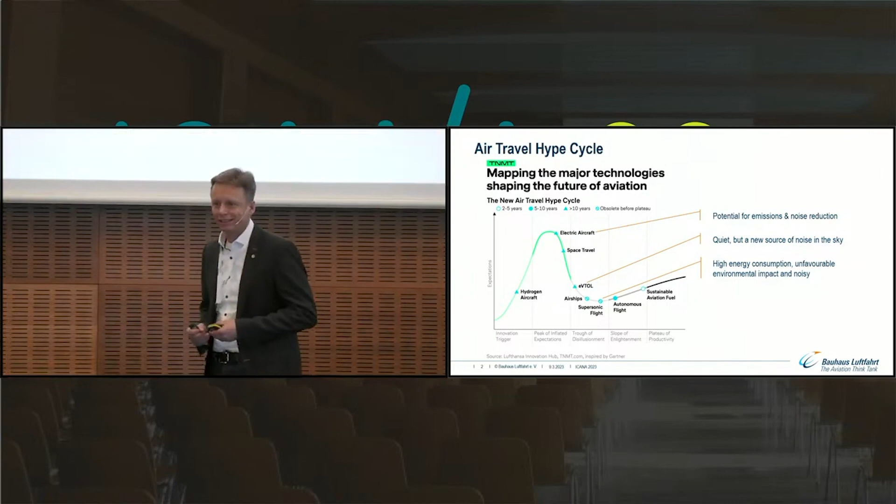And the first and foremost concept that I found was from the colleagues from the Lufthansa Innovation Hub. In the past few weeks, they looked into the Gartner hype cycle, the technologies and the different stages and where they are. There were many things that we are also dealing with, but they reflect also on what might happen with respect to noise.

Many things have been mentioned: sustainable aviation fuels, hydrogen - that's emission avoidance and reduction rather, it has little to do with noise directly. Autonomous flights only make the cockpit more quiet because there are fewer pilots, but not necessarily on the ground.

There is a bit of potential with electrical flying. We are far away from having that in aviation. Space travel, I leave that out.

Another subject found on the hype cycle is eVTOL, the air taxis. Definitely that's not a source of noise that we can compare with what we see at the airports, and it will affect a different area, but it's a new type of noise that we are facing, and we have to find out whether that's acceptable for inner cities. But it has nothing to do with our subject today.

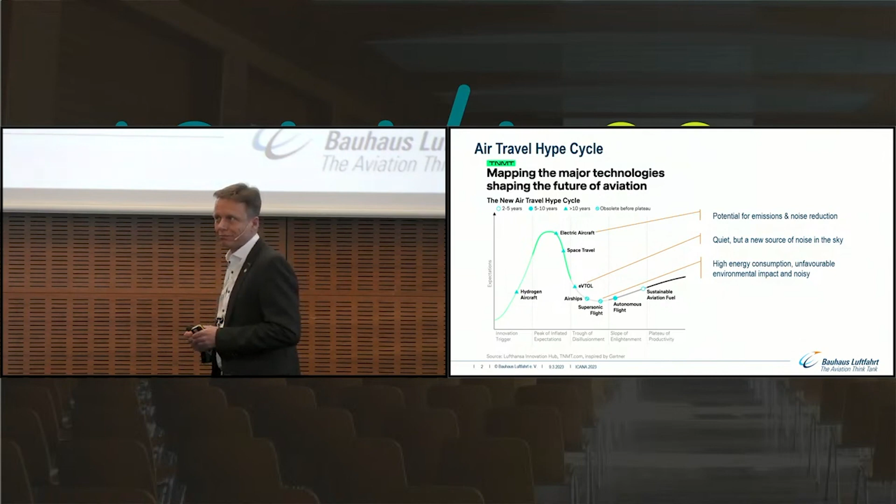Then I found some other things that really stroke me. Airships - in terms of noise, definitely nice. If you have ever seen an airship, very quiet, but for transportation it doesn't play a role. And also here it's regarded obsolete.

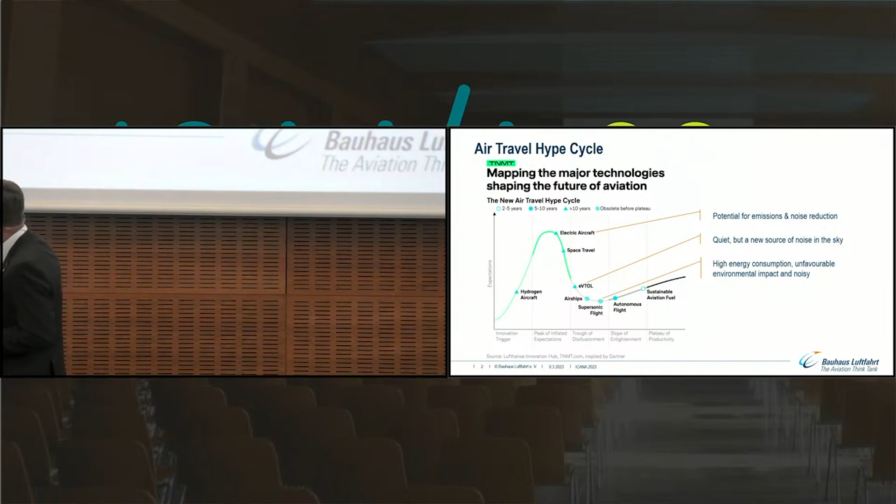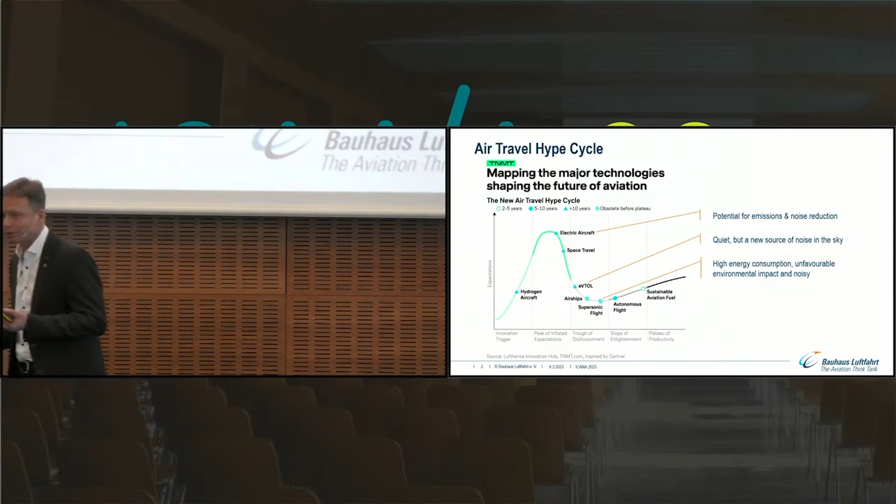Another subject that has come up is supersonic flight. I was happy to see here 'obsolete', because for quite some time we have been of the opinion that both from the energy point of view, energy consumption and emissions, it doesn't make sense to really deal with that. And for noise reasons either - if you've heard the Concorde when starting, for inhabitants that really was no fun.

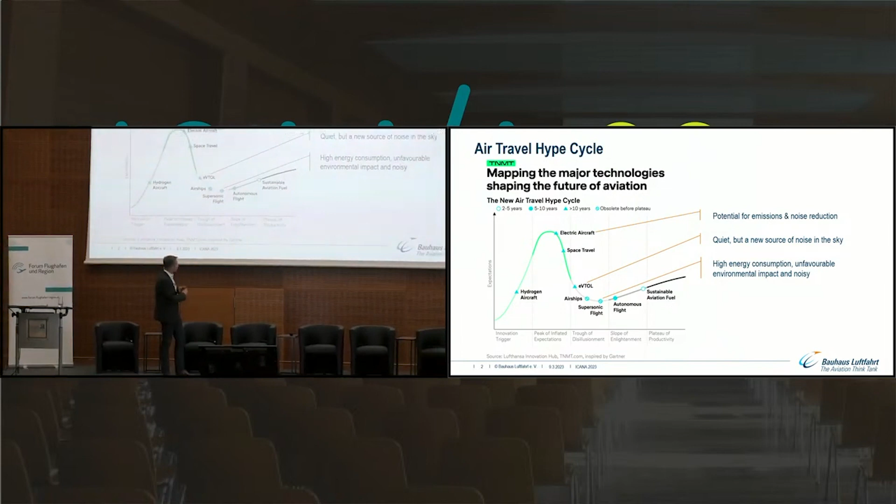So that's the rough framework of what we do in long-term research. Just to give you an idea where I come from: Bauhaus Luftfahrt is a very small research institution funded by the federal state of Bavaria and some industrial companies. We were founded 17 years ago.

We are 50 people only, and we shall have a look at technologies far away for the future of aviation. And Bauhaus Luftfahrt says it - Bauhaus, we work interdisciplinary. We are not only engineers, I am an engineer, but we also have people from natural sciences, from the economy and social sciences as well. So having a look at aviation from all different angles.

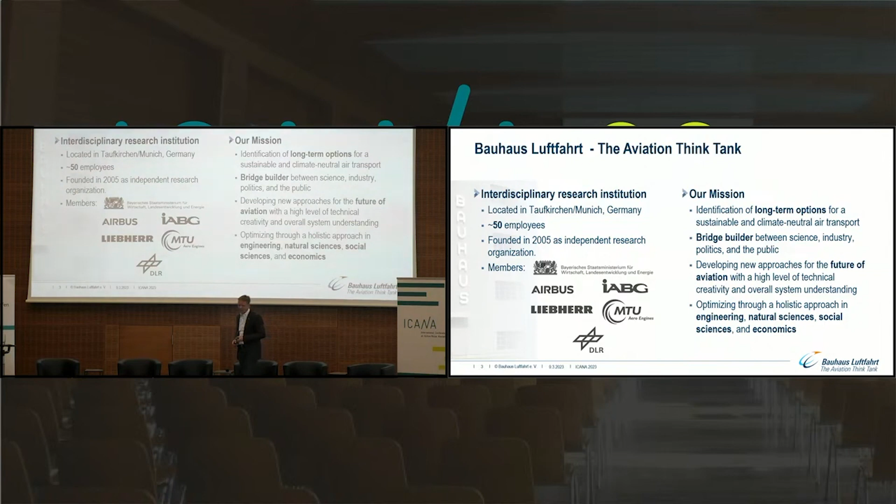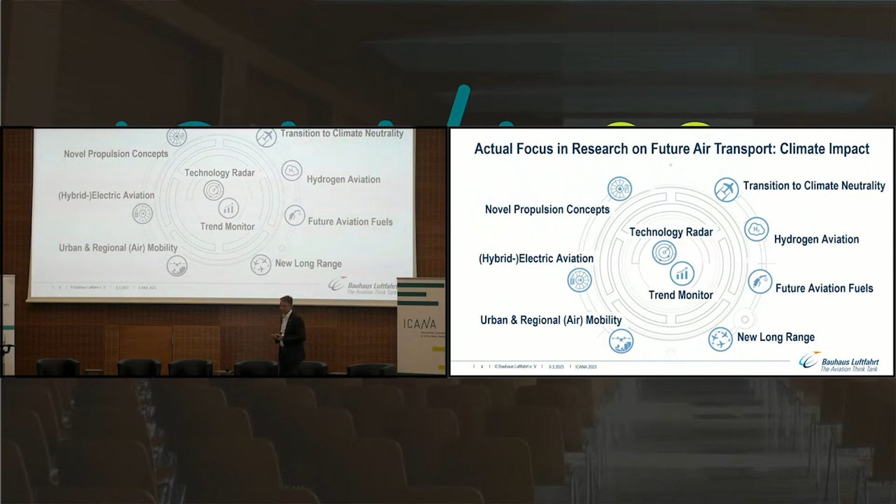If I now look and see what we are doing at the moment, well, we have projects dealing with technologies and trends. These are our recent research fields. And here you find little noise only - mainly it has to do with emission prevention and new drive concepts. That's what we should say here.

Where do we have areas dealing with new aircraft in connection with noise? We have the area of small planes, commuter aircraft in the past. Today we call it regional air mobility. It's a very small area and it's declining, although more and more smaller companies are working on it. That would be an area where relatively quickly we could switch to electrical systems, and that's the goal, but it's extremely small compared to total air traffic, so it wouldn't improve the situation.

There's one other area where a lot of things are happening. Fuel burn is important, and here it's short, medium range, A320, etc. A lot is happening here, also in terms of technologies. Here we can do something, and maybe we can think of batteries and electrical drives.

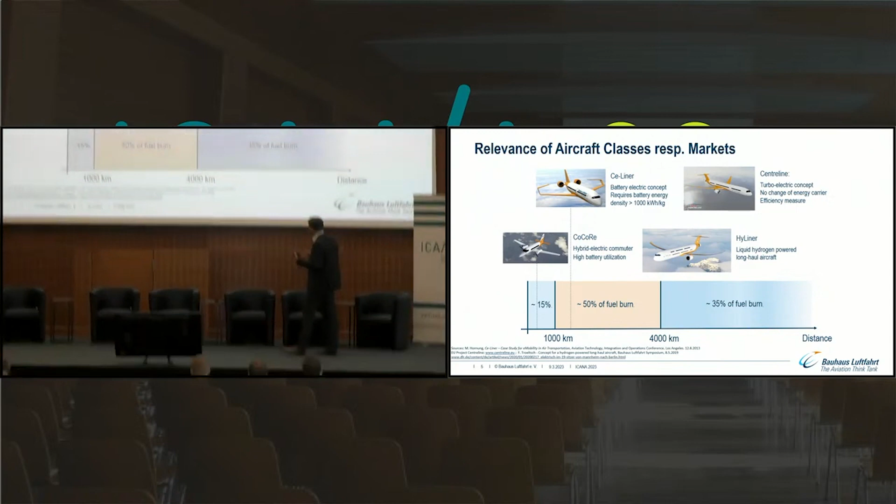And then one other area, maybe which wouldn't affect most passengers of fuel reduction, that's long haul. Here we can't really change to trains or other means of transport, so we'll also need that in the future.

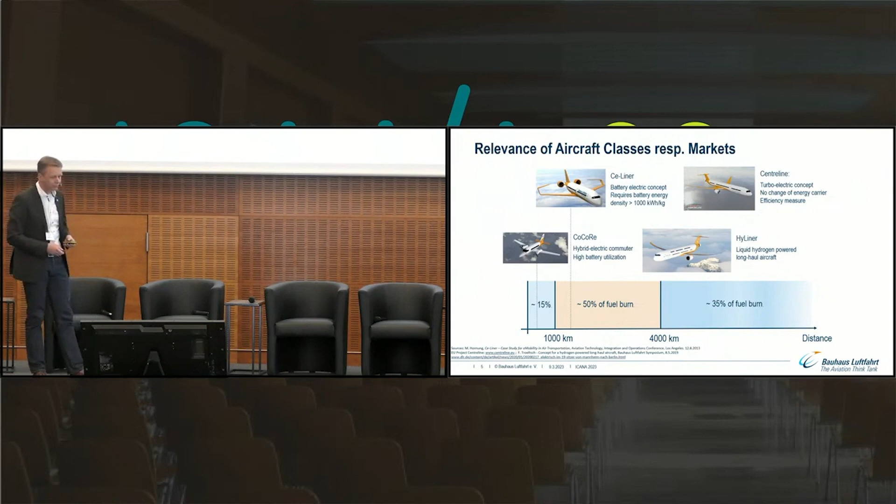Then let's have a closer look at technologies, the drive systems, propulsion systems. We deal with radically new propulsion systems for the engine as such. We've heard a lot already today about what is happening here in order to reduce noise. Then integration of propulsion.

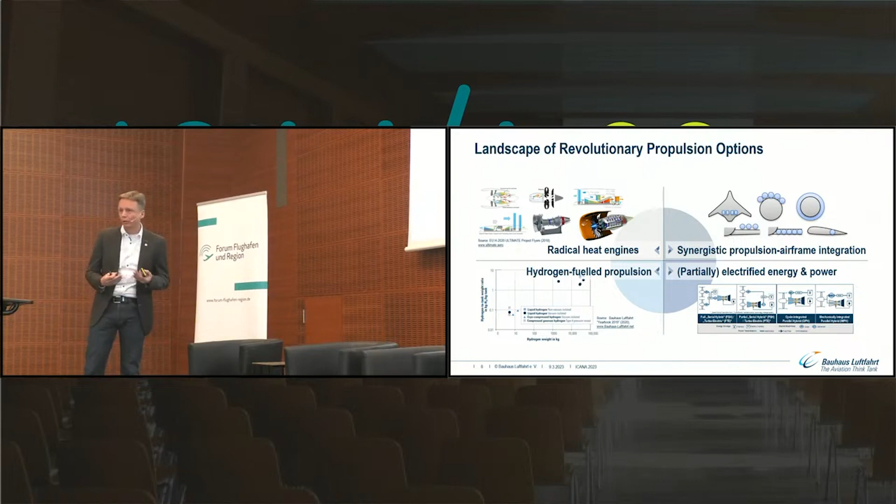Maybe we can do a bit here. The shielding, that was mentioned several times before, how I can include that in the concept development right from the beginning. Hydrogen has little to do with noise at first glance, but if I incorporate concepts like fuel cells, I have a stronger electrification and maybe reduce noise as a result. And this is happening in hybrid systems and partial electrification.

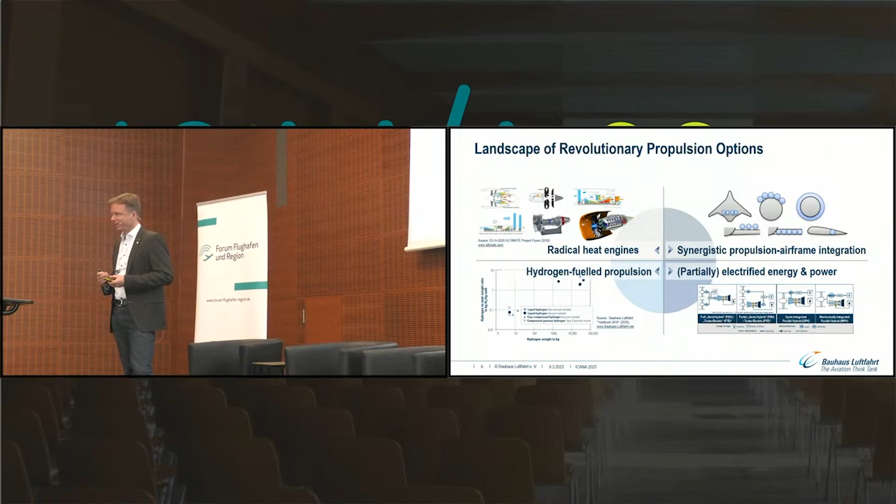Now, a little spoiler before I show you the next picture. We also deal with projects and concepts that will never ever be implemented that way, just to see what the consequences would be if we were to apply it. In terms of noise, what you see here is definitely not what most of you want to see.

There was the question whether travel times could be reduced within Europe. That's a goal of the European Union, to 4 hours door-to-door travel times. And then people came from a neighboring university saying, if you take a closer look at the urban landscape here in many cities globally, there would be place for an airport. And a cross railway platform is in the city.

So having said that, having looked at the project, how would an aircraft in the inner city look like? In terms of principle, it would work, but no one would build that. And it became clear very quickly, we need a completely new aircraft. It wouldn't work with the existing planes in terms of safety, but also in terms of noise, it wouldn't work. So that's where we looked into it, what would be possible here.

Many things have been mentioned already today, I need not talk about that: shielding, landing gears, fairings, etc. And you can make planes quieter if they fly slower. In comparison to the A320 Neo, here we could do something more with smaller and lighter vehicles, or planes rather. And the same also with the approach angles.

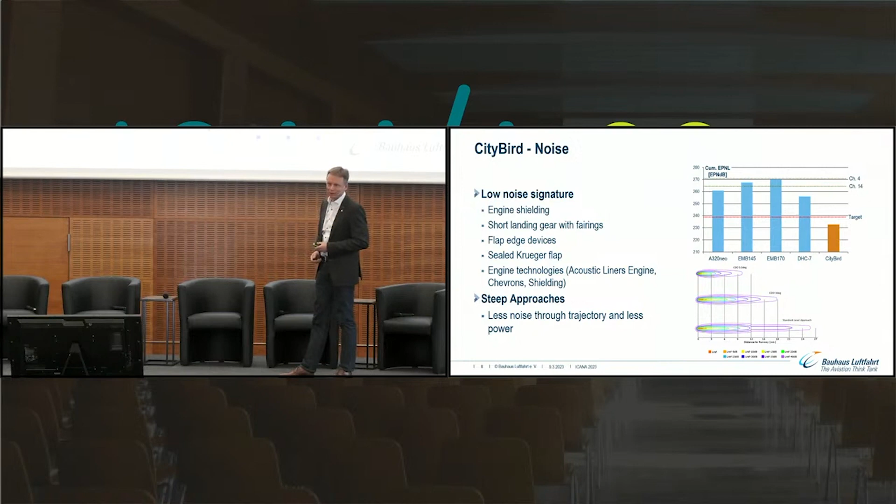The 12-degree angle was mentioned. We wouldn't do that, but 5 degrees would do something, would change it. We consider this also with respect to the technologies, that you could use them also for other projects, and therefore it's interesting for us, even if such an airport will never be built that way.

A different subject that is mentioned in connection with noise is electrical flying, electric aircraft. Bauhaus Luftfahrt very early dealt with the idea whether you could have an aircraft larger than A320 and electrify it. We had a project on that and even had a first draft. It all would work out, with the exception of one subject, the battery.

You would need batteries if you really wanted to fly it. Everything that's in the cargo space would be batteries then. And even with an energy density that we don't see for the time being in terms of the potential in the periodic system, we wouldn't be able to see that. So that will be difficult. We just wanted to know how far you would have to go.

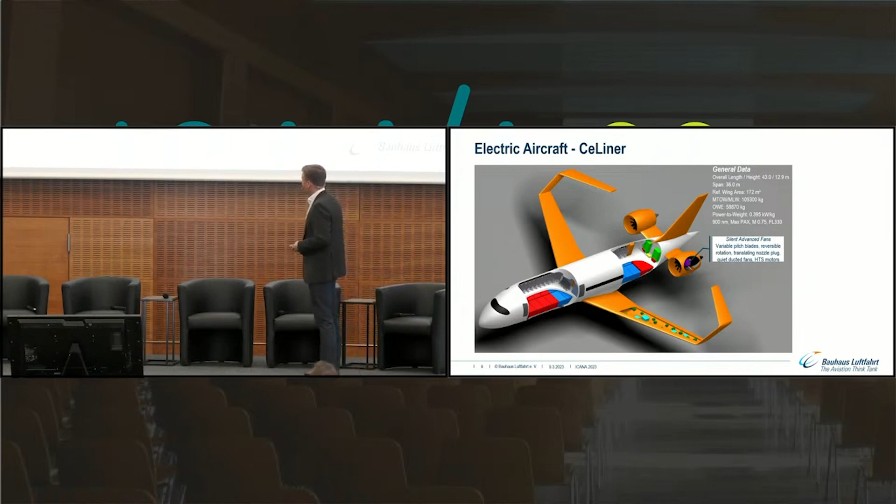But what really would have an influence on noise would be the propulsion. The core propulsion doesn't produce most noise, but with an electrical drive, maybe you could use variable pitch blades and other things and optimize the noise situation. So that would be possible, but nevertheless, we miss the right battery for that.

Then something else. If I have a look at today's planes, what else do we have in the pipeline? We want to improve efficiency as far as possible. A catchword that you hear often among researchers is the 50% aircraft: today's aircraft, with today's technology, 50% more efficient. Is that possible? And that also wouldn't have an impact on noise.

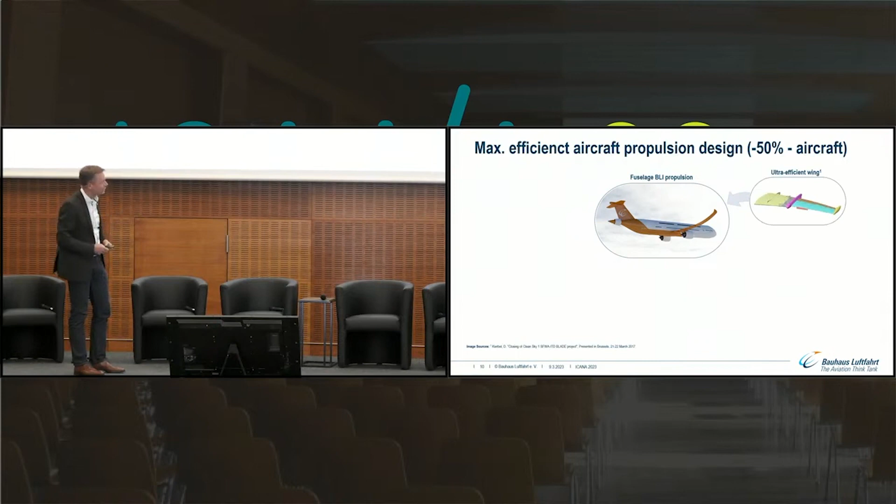First are the propulsion systems, so that I reduce the fuselage resistance. If I have a different wing, an ultra-efficient wing, how much noise is created with the wing? So with a better wing you can achieve something.

Hydrogen, I need not talk about that, but electrical drives would have an impact on noise. And then everything around the fuel cell. Today I have power units and a little gas turbine which also produces noise. If I use a fuel cell run by hydrogen, I could do that. Apart from the fans, that's really silent.

I saw the first test tracks in Ottobrunn with Airbus. They're extremely silent. It feels good. And then, of course, the engine has to become better and better. That's an old example. I'll show you something else.

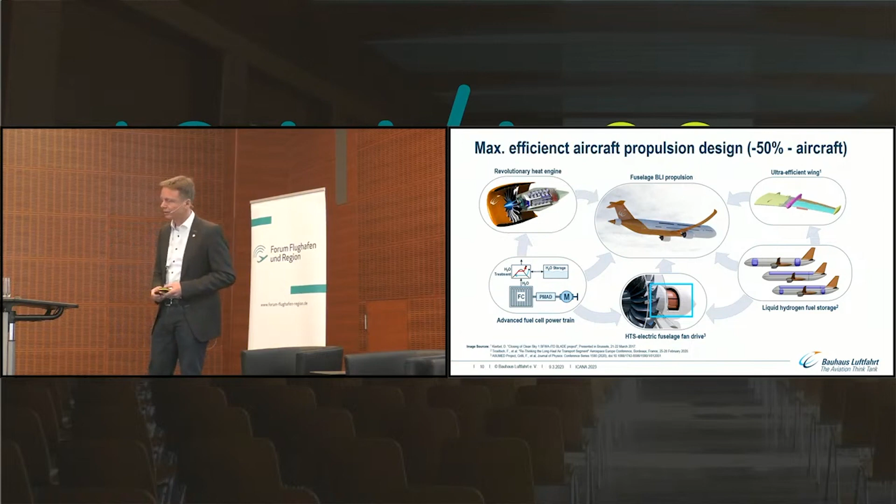With our partner companies, I just looked around. With MTU, they're developing a water-enhanced turbofan engine at the moment. In principal terms, it's already known with gas turbines that they become more efficient if I inject water before combustion.

On the ground it works well. In the air we had it with the 747. There was a water tank for starting so that there could be higher load on the engine. Here the idea is that I can inject water throughout the flight and have a more efficient engine consumption and reduce fuel consumption.

But where does the water come from? The idea was you condense it directly from the exhaust flow, and you try to integrate that into the engine nacelle. From a noise point of view, I looked at that. I didn't discuss it with the MTU colleagues, I didn't dare to do so. But from a noise point of view, you have a very long and relatively massive nacelle.

And it's more appropriate also to reduce and absorb noise. The same also for the core engine - it wouldn't produce a direct primary stream. Here it goes completely through the condensers in several loops through the nacelle. So it's reduced a lot, but it wouldn't produce any thrust any longer. You have to consider that.

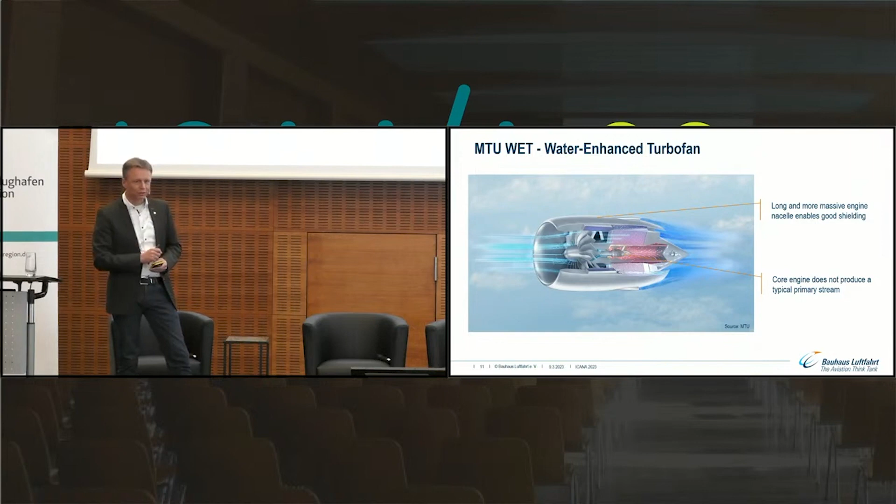So we discussed that concept for a long time. We didn't develop it, we were only allowed to calculate everything. So we said you can't get 30% efficiency gain immediately, but there is something behind it. It might work, but it's a long way to go till such systems will be offered. It's an interesting approach, and also in terms of noise, it could have a good effect.

This picture was shown already - open fan, open rotor. In terms of efficiencies, it's highly interesting, also for us. We need to admit that. So we need to see whether we can do additional savings.

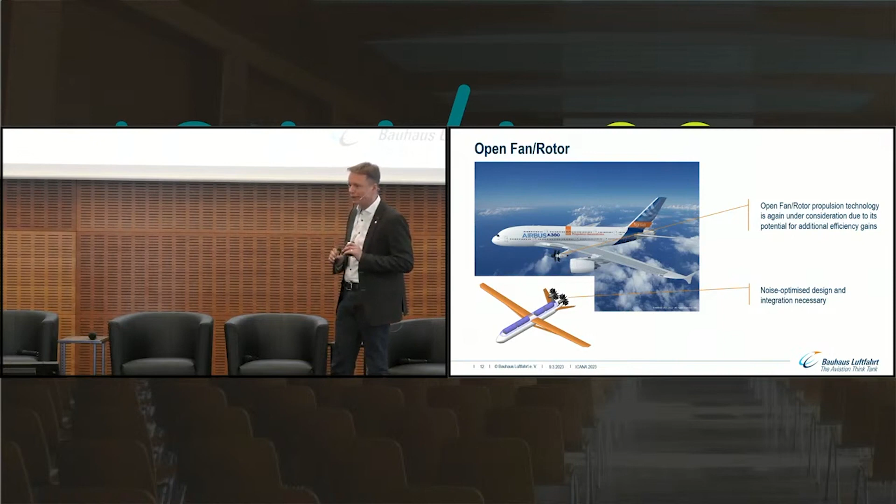How you can install it in a noise-optimized design - you have to see whether you can use shielding or improve the propeller design in such a way that noise is reduced. I mean, that would be the most interesting part of it. Basically, an open propeller is not a noise problem if it's designed properly and used in the right speed range.

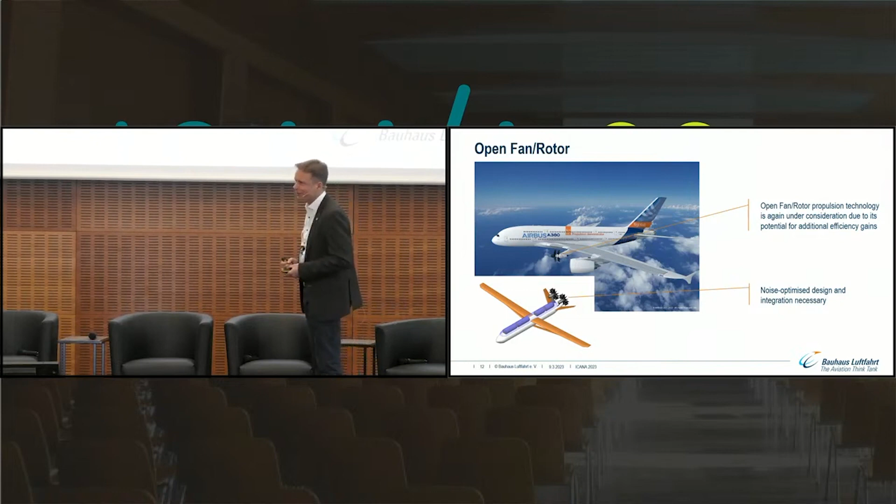More and more - that's a concept that students developed, and therefore it looks a bit rudimentary. But what you see easily is there are more and more approaches to fly more slowly, and then such engines or propulsions are much better for noise.

And this was mentioned several times before, the blended wing body. Two different concepts - the MAVERIC from Airbus is seen more often, or the Flying V of the Technical University of Delft. You can see that the engine is on the fuselage, which is good for noise radiation. We won't see that aircraft very quickly.

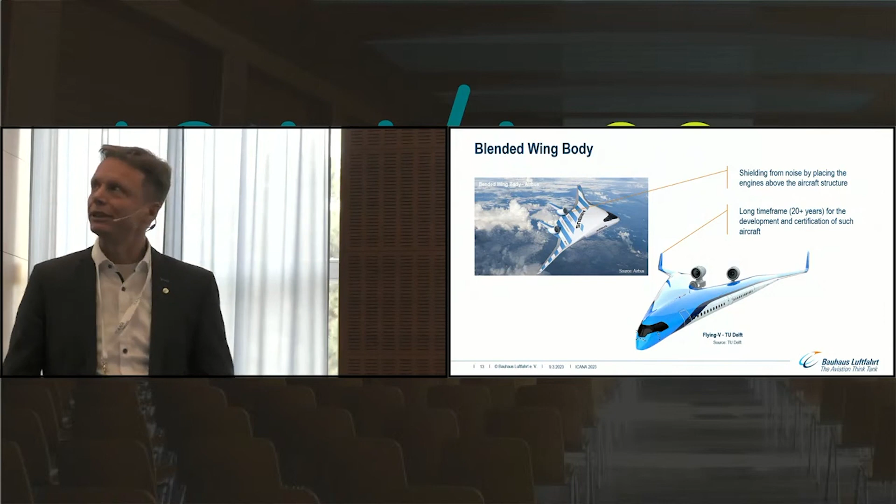That's what we think, because the classical arrangement for airlines and for operations has a lot of advantages. And the development of such planes would take very long till we can use them for everyday flights. And then something else comes in addition, and that's always a big obstacle - a manufacturer basically wants to have an aircraft that can be stretched or shortened, or develop a whole family of aircraft. And with that concept, that's not possible at all.

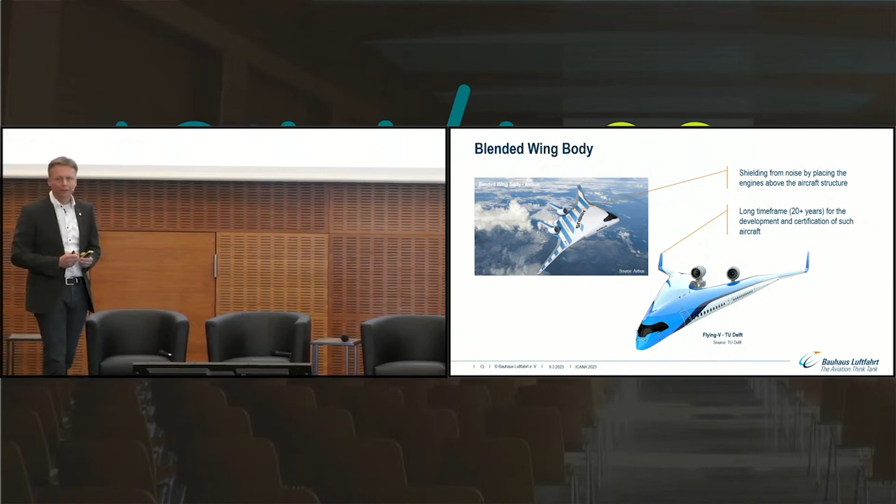If you build the aircraft in one size and you want to have one 10% larger, like the A320 or A321, you have to build a new aircraft. And therefore, I don't believe that such concepts will come in the next 20, 30 years for classical passenger transportation. For specific purposes - transportation, cargo, military - yes, maybe, but also there, savings that we have seen in our concept studies compared to classical configurations wouldn't be very big.

The wings are much more aerodynamical, but the weight in the wing, of course, is an important point, but I can have very long, slender, and more efficient wings. As I mentioned before, with hydrogen, the APU can be replaced by fuel cells, and also as the wing wouldn't house fuel any longer, I can have different designs, but less vortex and turbulence.

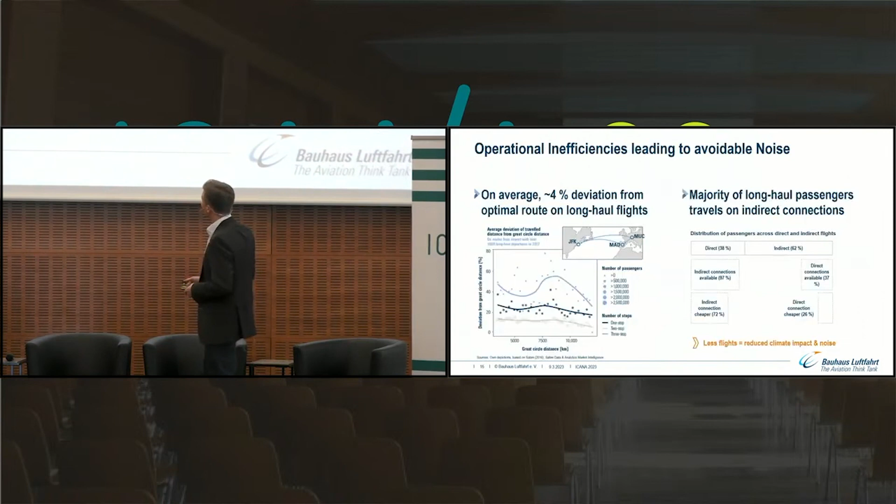So I talked a lot about technologies. What we also looked into, when we looked at long haul, is how people fly at the moment. First, it's about flight reduction—maybe you should not have flown at all in the first place, and that will also have an impact on noise.

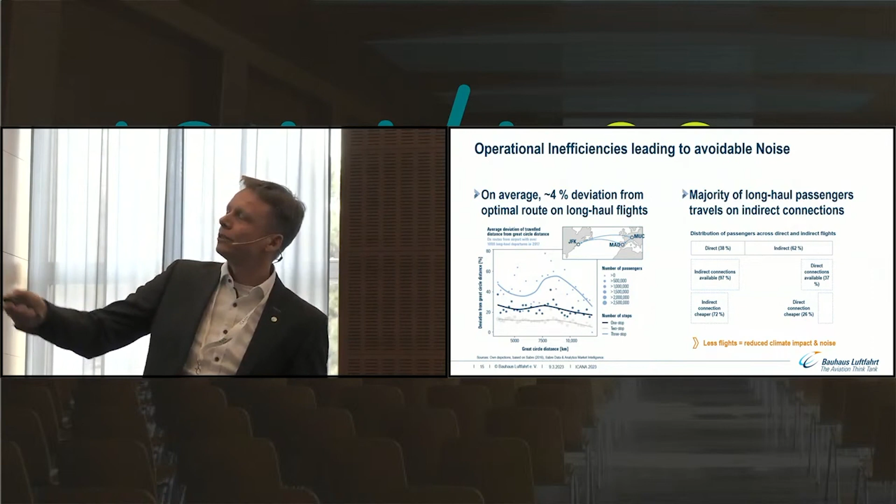Then we looked into long distance and long haul, and we looked at how flights are distributed—one stop, multi-stop flights, and how many detours people take. We found that nowadays, because of the airline system, you make a lot of detours and have more flights than you actually need for the transportation volume, especially with long haul.

Most flights are indirect. You have certain hubs where you change flights—first a short distance flight, then a long distance flight, and maybe you change again for a shorter flight within the United States. It's not that direct connections wouldn't be there, but today's systems and pricing often lead to the situation that people buy multi-stop flights.

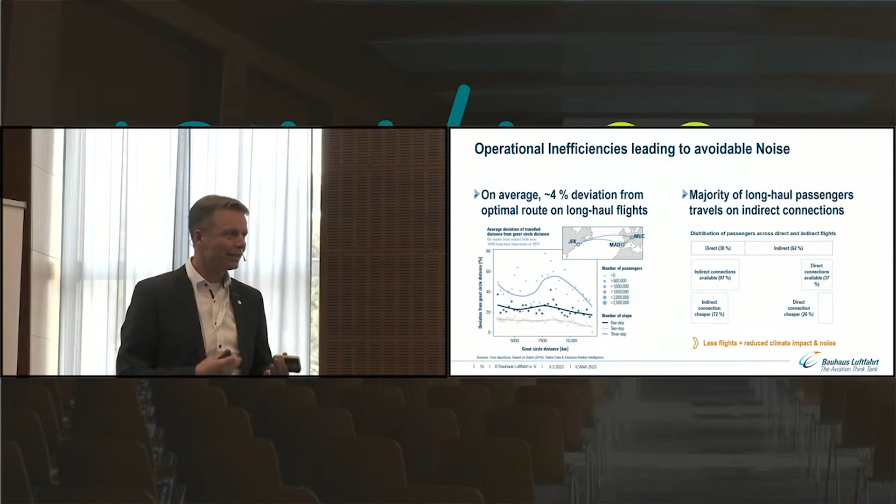It has changed a bit in the past two to three years. The study was carried out shortly before Corona. Now you don't have such large aircraft any longer, more smaller ones with direct connections—that goes in the right direction. But nevertheless, many, for cost reasons, would still use the flights with more stops.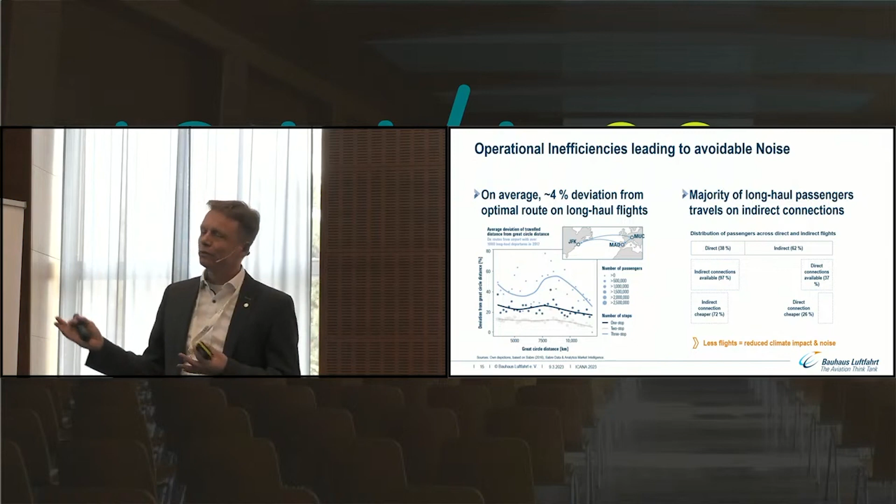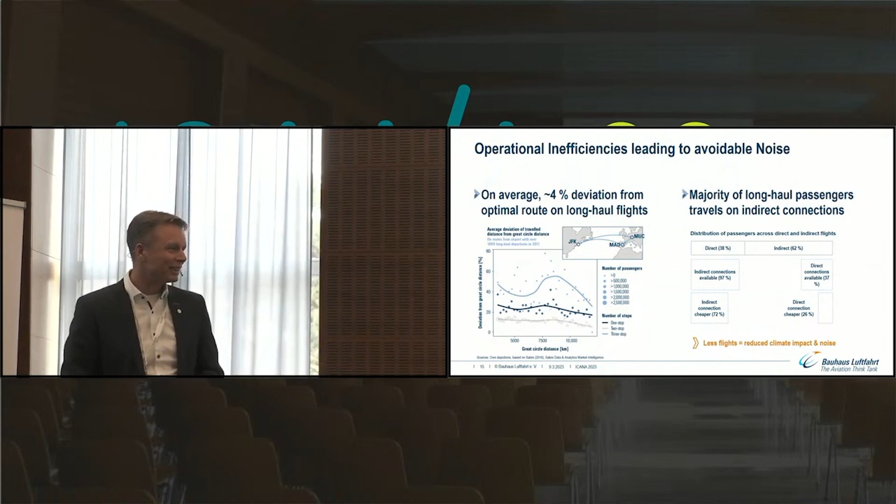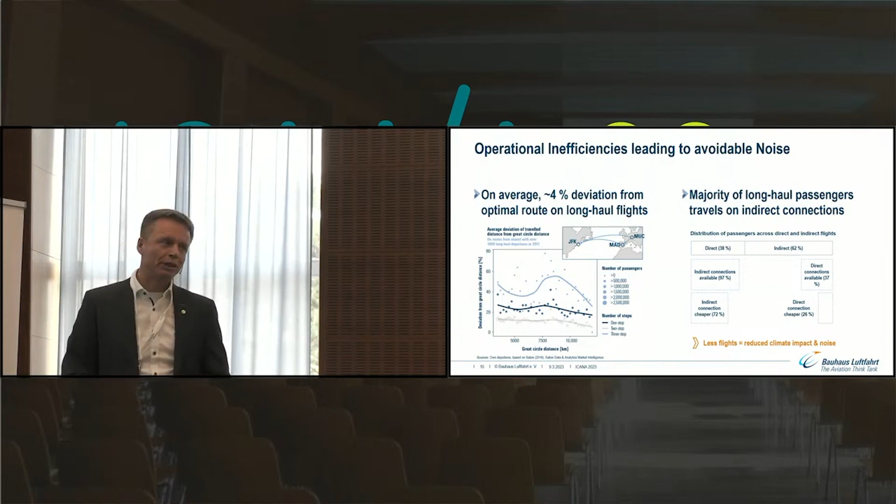That's really where we can do something, where we can achieve the goal more quickly—fewer flights is less noise. We had a discussion with airlines and with our partner Airbus, because it would reduce aircraft sales if you did it that way. But on the contrary, there are other possibilities—aircraft can be used for different purposes, which would offer more advantages, but that would go too far for today.